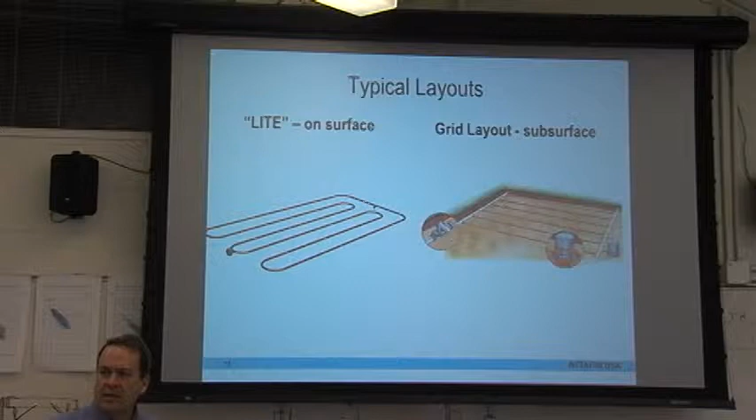Because of the maintenance and labor to install it, people are going more to the inline, and the inline can handle many more different applications within our landscape.

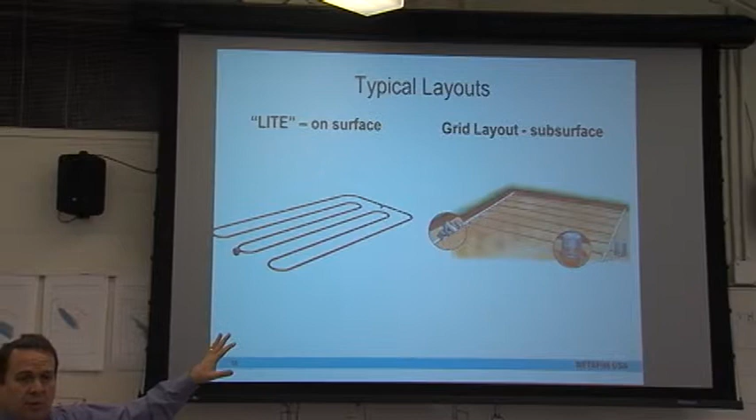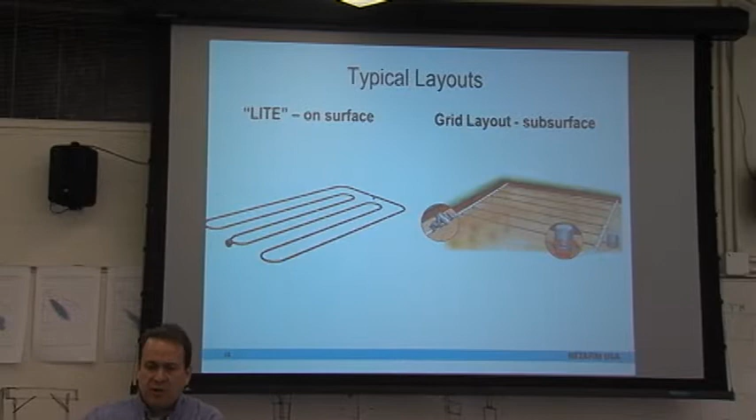So what we have is two layouts. When you're designing a system, you're going to be thinking about two different layouts. One is what we call a LITE system, where we're going to have a valve, filter, and a pressure regulator up front connected to the main line. Then we're going to connect the Netafim tubing, or inline tubing, and snake it out through the shrub bed, then bring it back in on itself. Very quick and easy install.

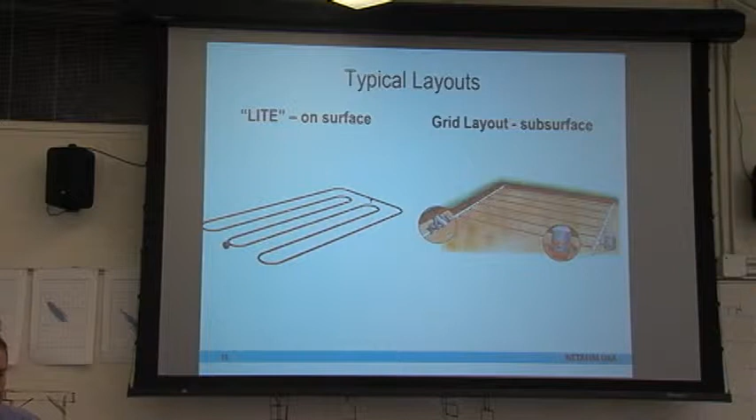These tend to be used in residential applications, smaller shrub bed applications, and flower beds. We'll go through the parts and pieces later of how they get connected and what we're doing.

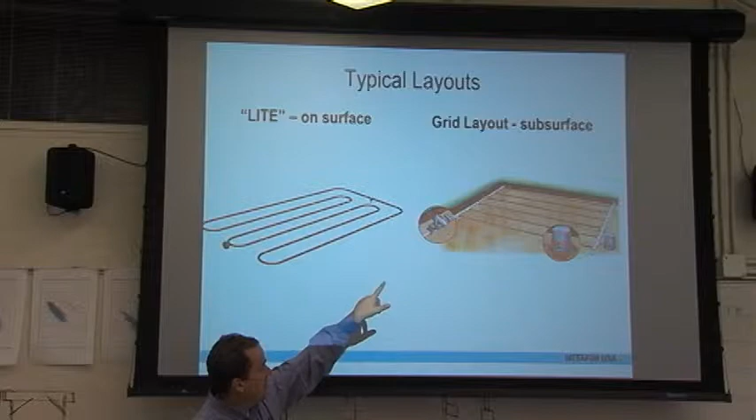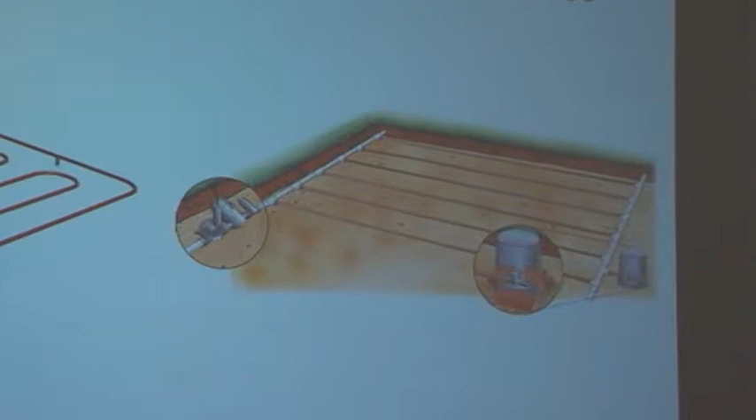The grid system, which is this one over here, will have a valve, filter, and pressure regulator. And then we have what we call a supply header, and that supply header is that piece of PVC going out there. Then we connect into that supply header with our tubing, and the tubing goes down through the shrub bed, and then we have what we call an exhaust header, which is this piece right here. Then on that we put a flush valve on this side. This header here is not connected to this header by any other means other than the inline tubing.

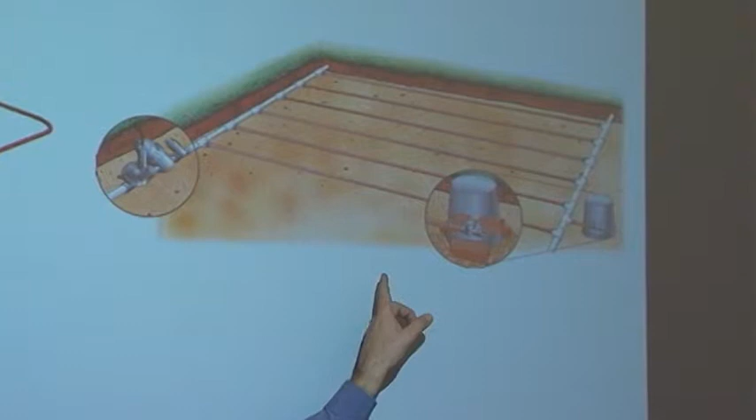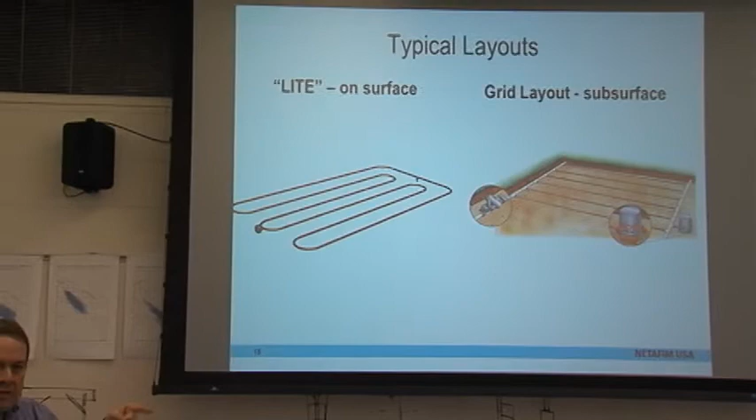So what happens is the valve turns on, the water flows through that header, flows down through the inline tubing, and the whole system's charged. The water's actually moving in a couple of different directions within the tubing, and then the emitters are irrigating and applying the water, and going from there.

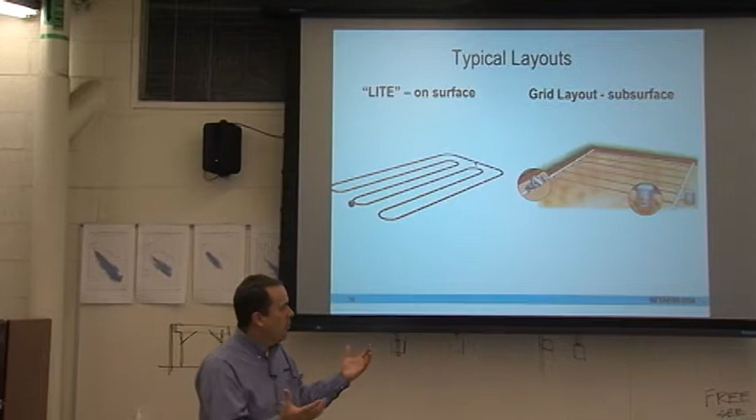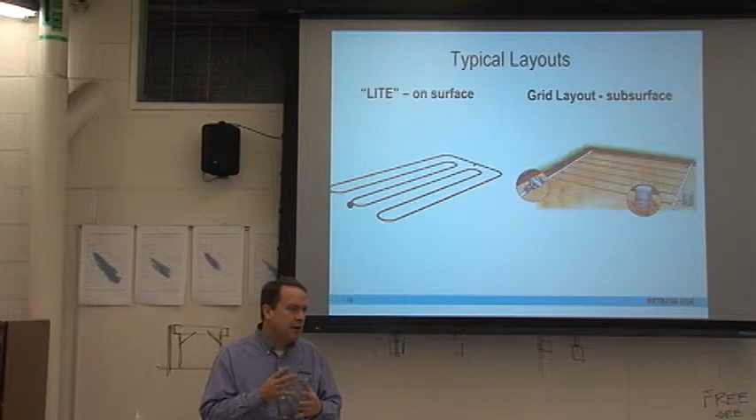This valve down here is mainly a manual ball valve, and what it does is allow us to open up the system and drain it in the fall for winterization, or it allows us to flush any dirt and debris that may have gotten into the system from someone cutting the tubing or a repair. They'll open that ball valve up while the system's running and flush the dirt and debris out of the system.

So the trick here is, first of all, am I going to be designing a LITE system, or am I going to be designing a grid system? That's the first thing as a designer that you're going to be thinking about.

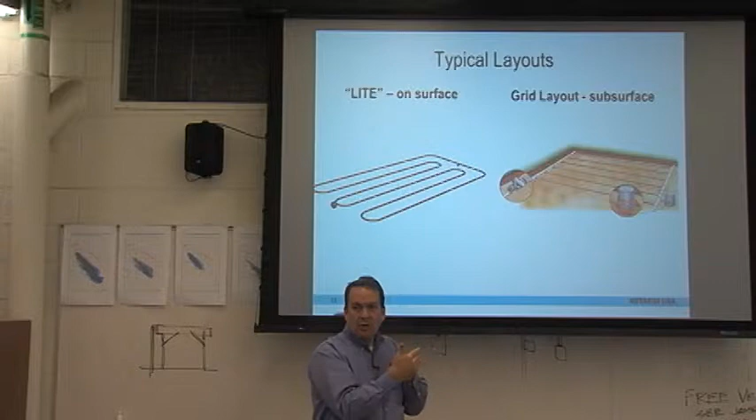After that, you need to determine what emitter flow rate I'm going to be using: is it the 0.26 gallon per hour, or the 0.9, or the 0.6, or the 0.4? And then what emitter spacing, and how far apart am I going to put my tubing? When you're designing that drip, that's primarily what you're looking at. We'll go through that here in a second.

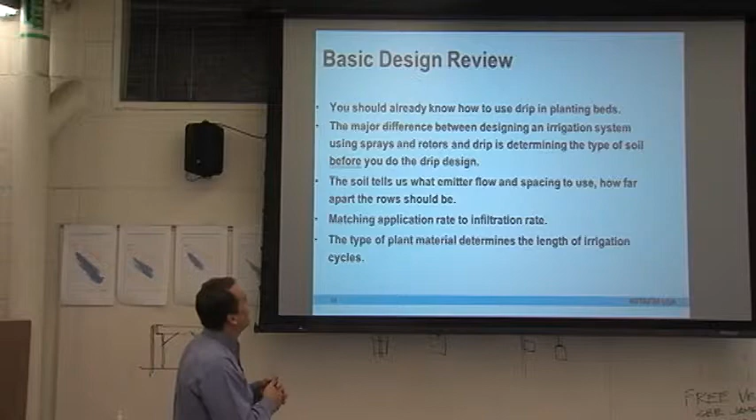This is a slide that I use for my contractors, so I say you should already know how to use drip in a planting bed. That might not necessarily be the case in this application.

The major difference between drip irrigation and overhead irrigation is we're not so concerned about what we're irrigating, whether it's turf or flowers or those kinds of things. We're more concerned about the soil in which we're applying the water to. With a higher clay soil, we know we have to apply the water slower, or else it starts to run off. So we're much more concerned about our soil types than the type of plant material we put in our designs. That's going to dictate how long and how much water we're going to apply on a daily or weekly basis. It's the soil that the water is moving through that we're trying to keep the roots alive for the plant material. That's one of our biggest concerns.

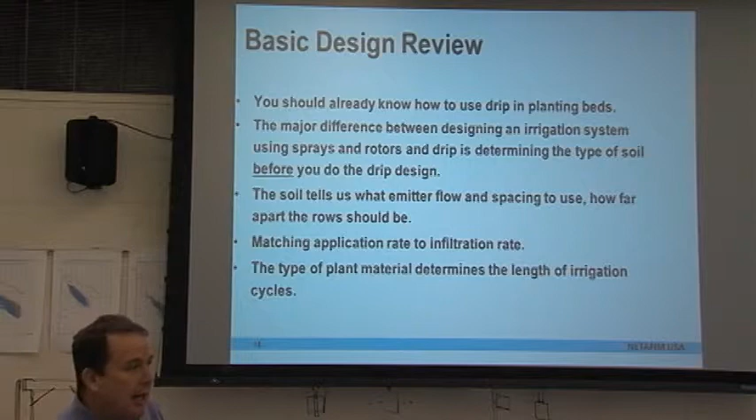Okay, so here comes our soils class, and I apologize for doing this - the first class of the morning, the week after a 3-day weekend. I apologize, it's not fair, I know.

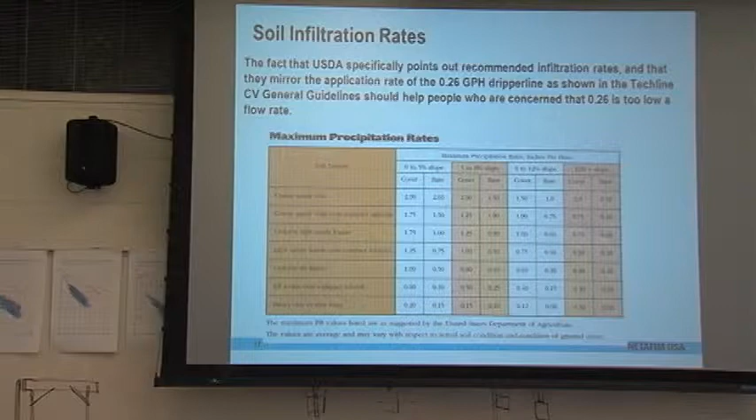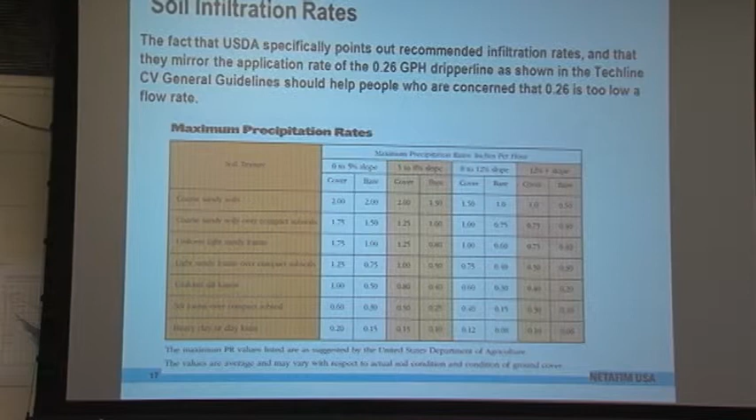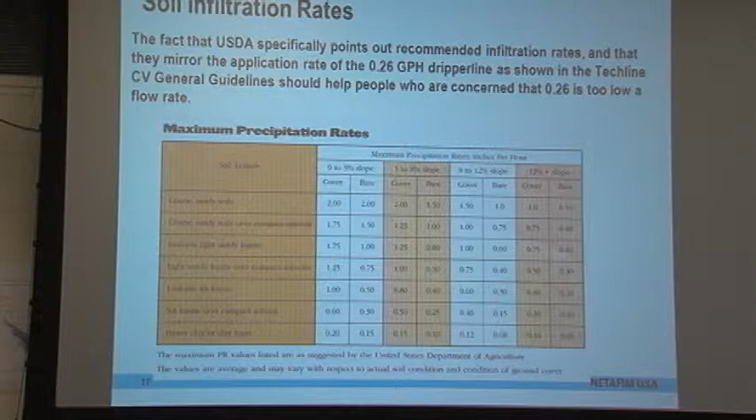Basically, what this is showing is the USDA took a look at the different soil types we have, and looked at the rate at which water moves through those different soil types. When we look at a clay soil, the water moves very slowly through there. When we have a sandy soil, the water moves through that sand very fast and tends to be more vertical, where the clay tends to have the water move more horizontally in the soil profile.

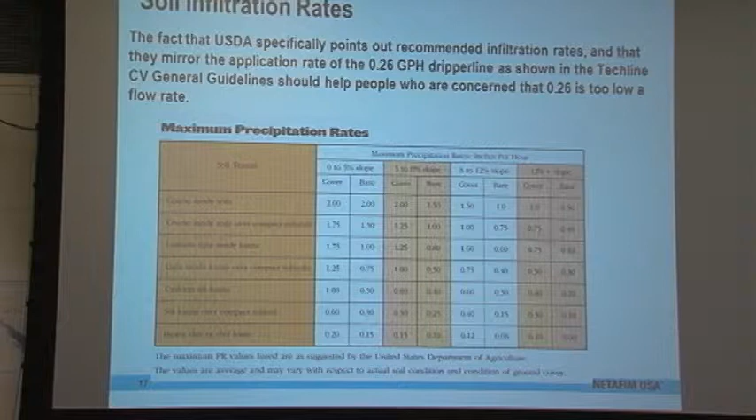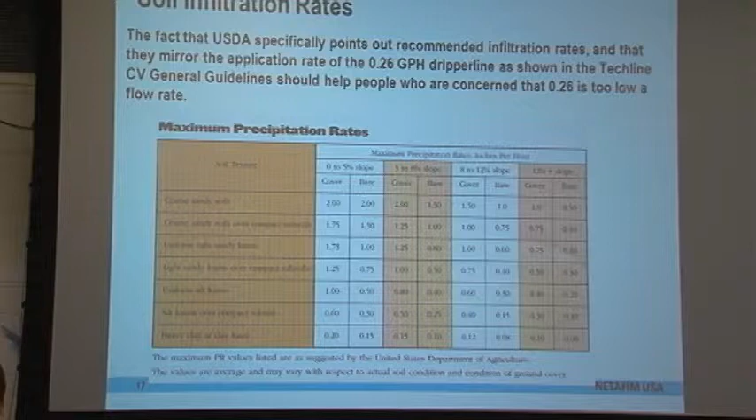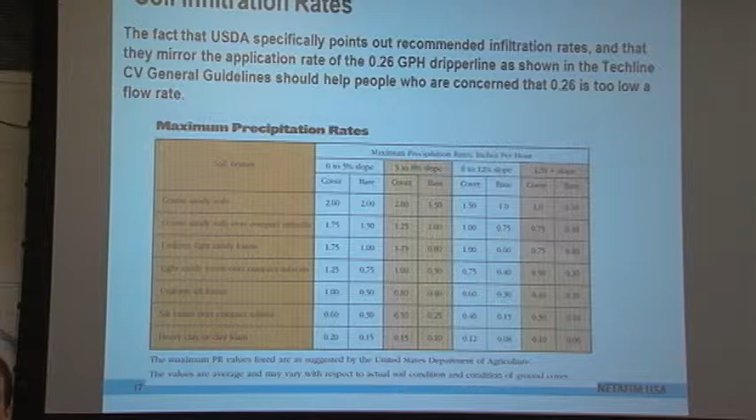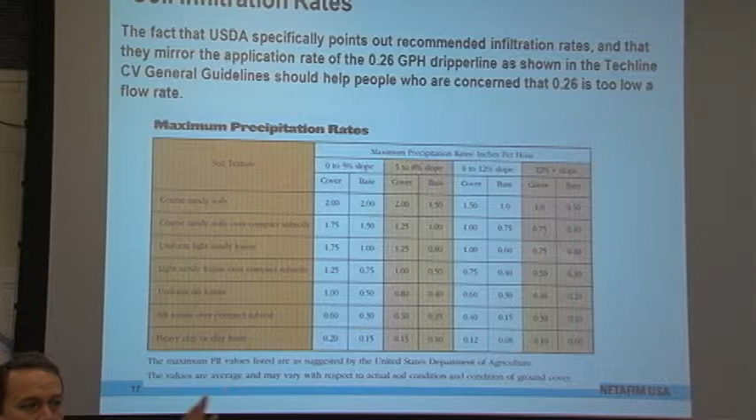So what they did is they looked at this United States Department of Agriculture chart, and basically they took the rate at which water moves through the soil and converted it to an emitter flow rate. So when you choose, remember I showed you 0.26, 0.4, 0.6, 0.9 - basically if I have a clay soil, I'm going to use a certain emitter flow rate, and if I have a sandy soil, I'm going to use a different emitter flow rate.

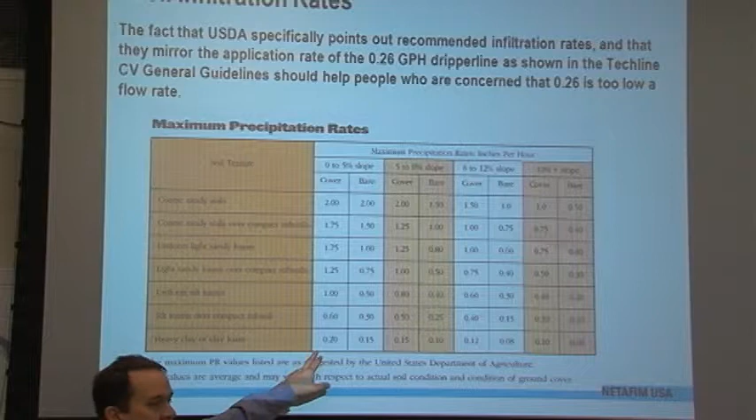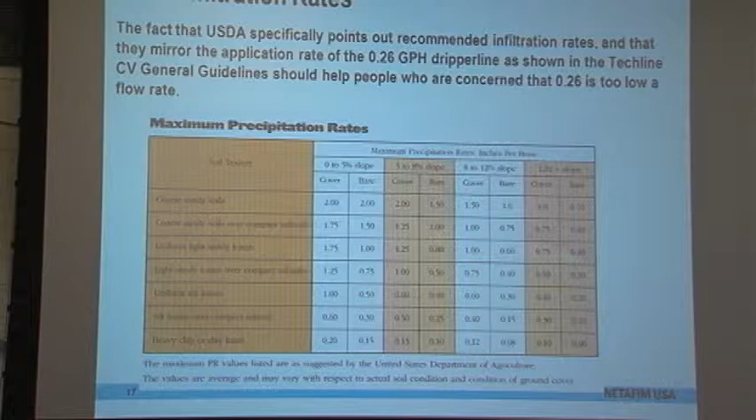Those emitter flow rates match up exactly with the rate at which water moves through the soil. What they found is that by matching the emitter flow rate with the soil type, they can move the water farther and faster in that soil than applying a higher flow rate emitter that the soil might not be able to handle.

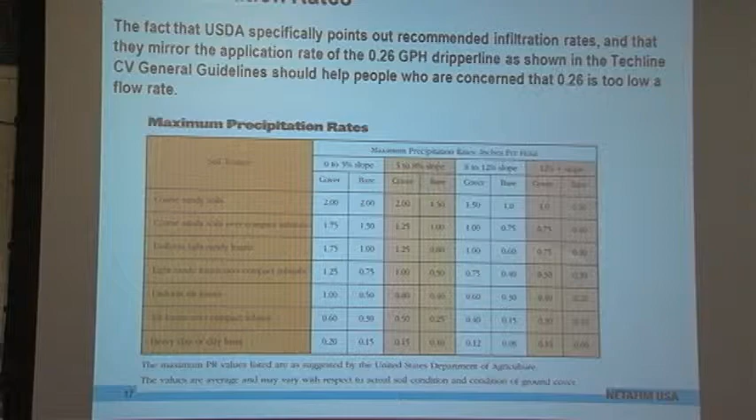A question - I'm assuming the cover and bare soil refers to whether there are plants providing shade. Correct, and primarily because...

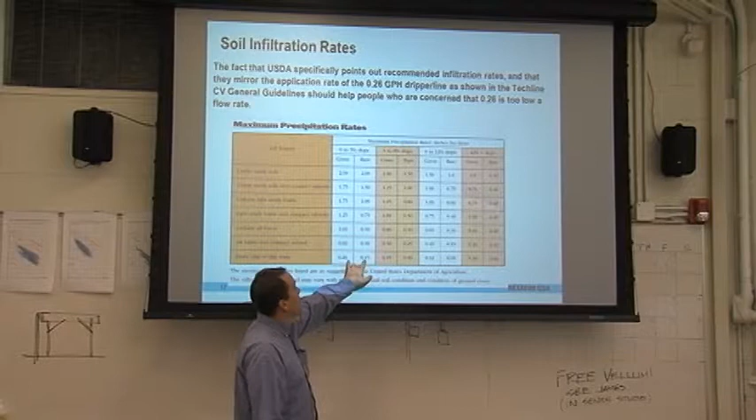The big thing here on bare versus cover is that if we have bare soil with no cover, that soil tends to dry out, and we know it's much harder to move water through dry soil than wet soil. So we have a lower application rate in bare soil because it tends to be drier. Once soil gets moist, typically on the drip side, we want to keep it moist - we don't want to let it dry out, because once it's moist we can move water through the soil profile much easier than once it dries out. It takes a lot more water to do that. So that's one of the tricks.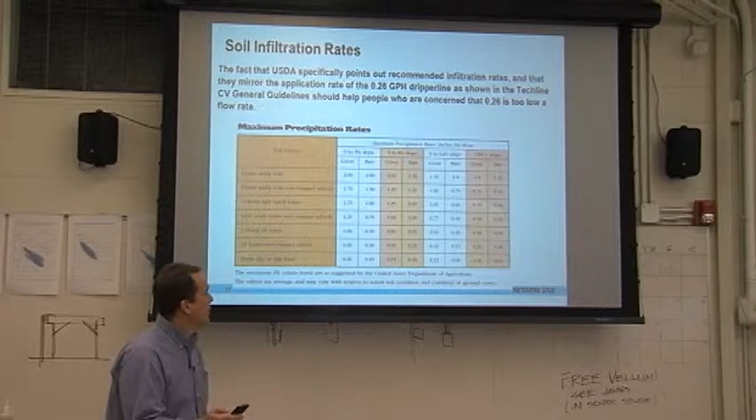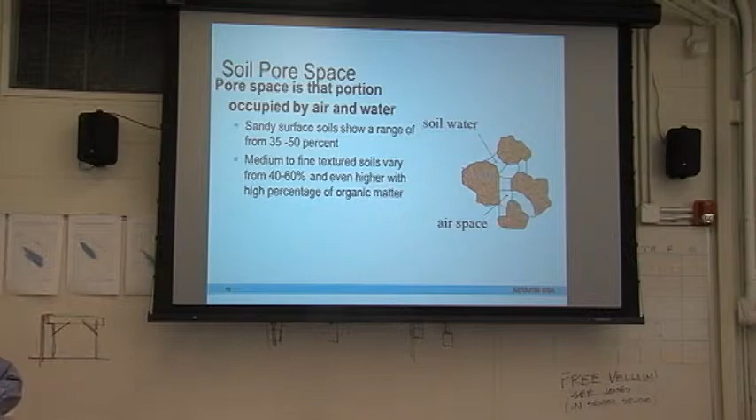Okay, we've all seen the soil triangle, I'm not going to go into that. But soil pore space - the space between the particles - is basically where we have air and water.

When we're looking at a sandy soil, the range of pore space is 35 to 50%. That's how much space there is in sandy soils. When we go to medium, fine textured soils, it's 40 to 60%. And when we get into clay soil, it's somewhere between 55 and 75%. That just means there's more surface area in our clay soils because the particles are a lot smaller.

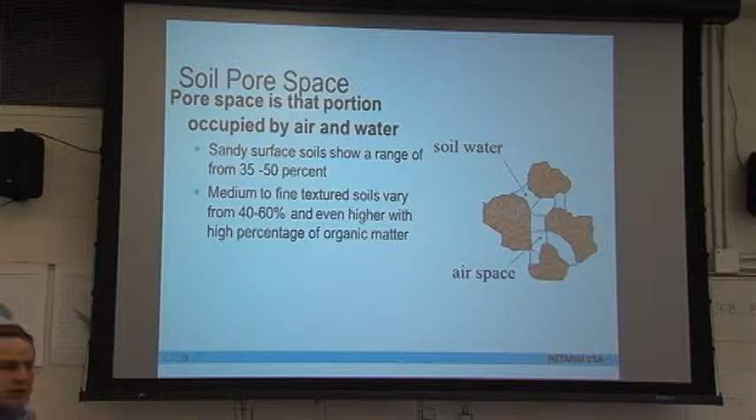The process of the soil-air interface is what we were talking about on that chart - the rate at which water moves through sandy soils. The larger those spaces are, the easier it is for water to move through those soil particles.

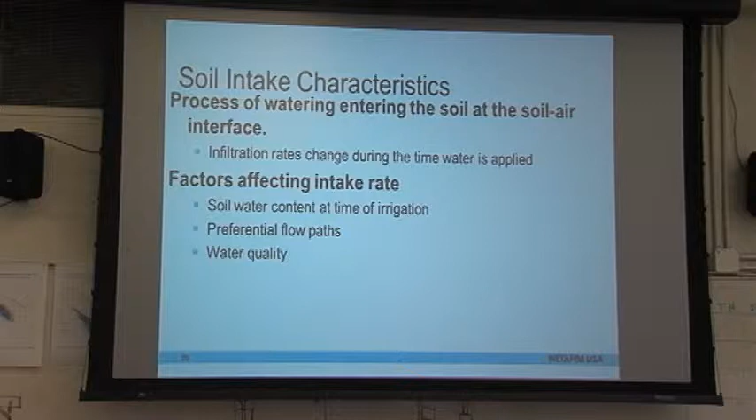The other thing we need to look at is that soil particles are negatively charged and water is positively charged. Once we have that attraction, as the amount of water increases, it reduces - the stronger that bond is, the drier our soils, and the harder it is to move water through the soil. Once we add more water, the greater distance we get, the less tension we have in our soils. I apologize for even going into that, but it is what it is.

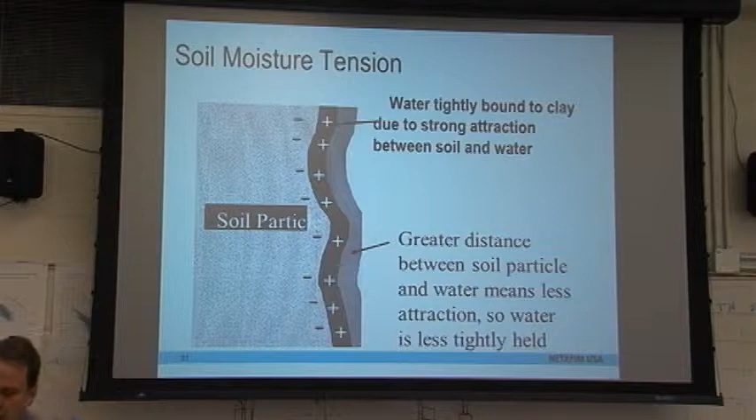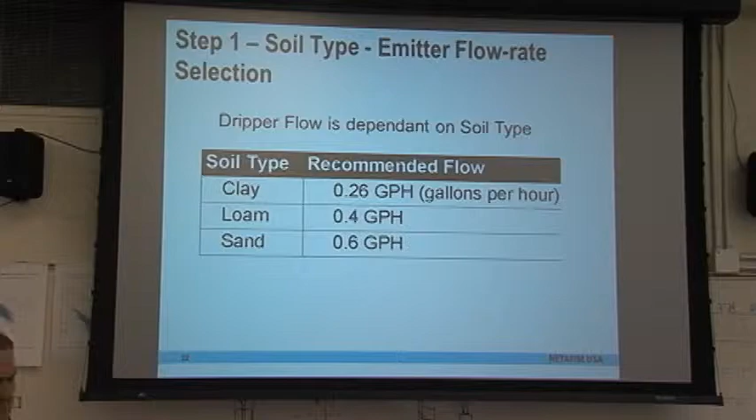I would hate going through that in detail, and that's why I went over it very quickly. So here's our design steps. If you have your catalog, you can follow along, and you can also follow along in that handout on page 8 of the catalog.

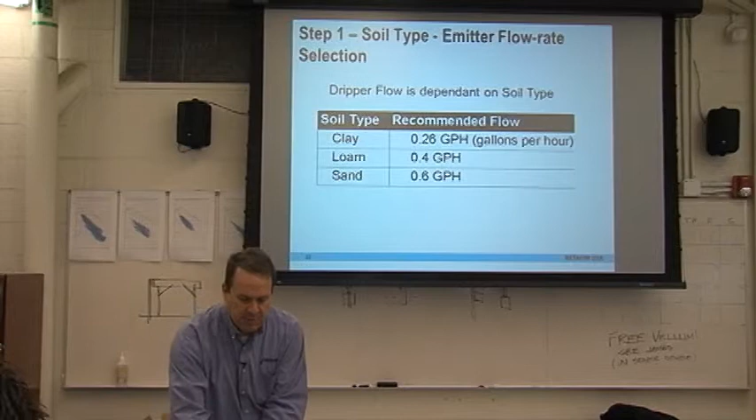This page 8 really is kind of what we're looking at from a design application - these are the steps you're going to go through. So we're going to basically look at the general guidelines chart there. The first question it asks is: are we irrigating turf, or are we irrigating shrubs and ground covers? Can you guys see that?

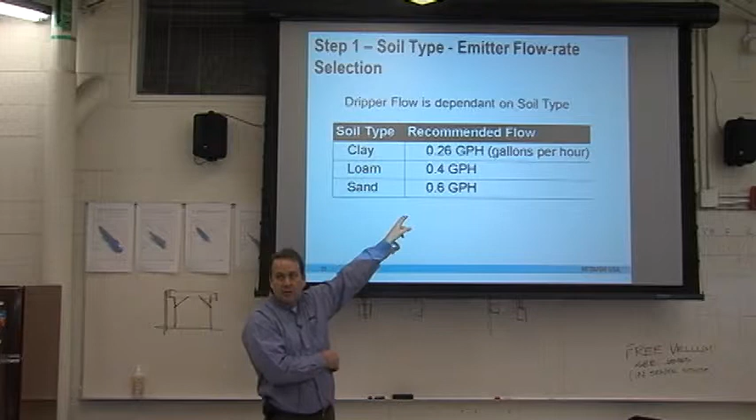Once we answer that question, we look down and say, what's our soil type - do we have clay, loam, or sand? That's basically what this chart is showing. If we have a clay soil, we're going with a 0.26 GPH emitter. If we have a loamy soil, a 0.4, and a sandy soil, a 0.6. This ties back into the soils we just talked about - we're applying water slower to our clay soils so we don't get runoff, and faster in our sandy soils.

I will tell you right now, 85% of the soils we deal with in the United States are clay. Because we're a glaciated continent, we have a lot of silts and clays in our soils, and that's the challenge we have. We do have some sandy areas, but not very many - a few loamy areas, but primarily clay is what we're dealing with.

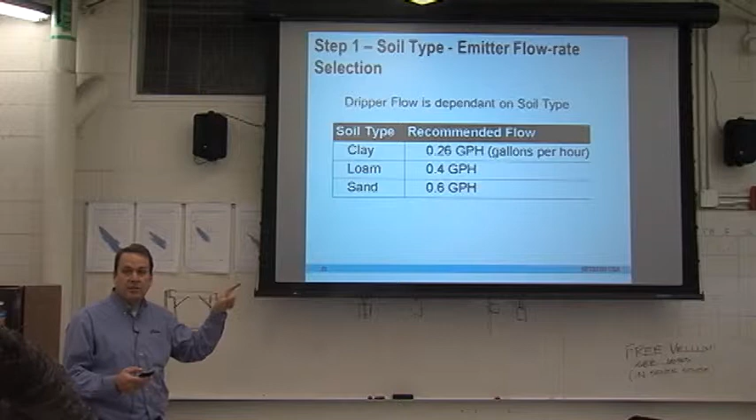So the answer for number one is we're going to go with a 0.26 emitter flow rate in our clay soils, or whatever the appropriate rate is. Now we need to determine how far apart we're going to have emitters in our tubing. There were three choices: a 12-inch spacing, an 18-inch spacing, and a 24-inch spacing.

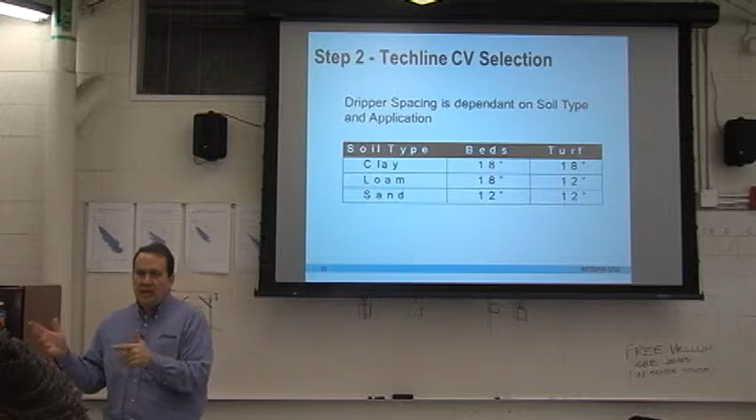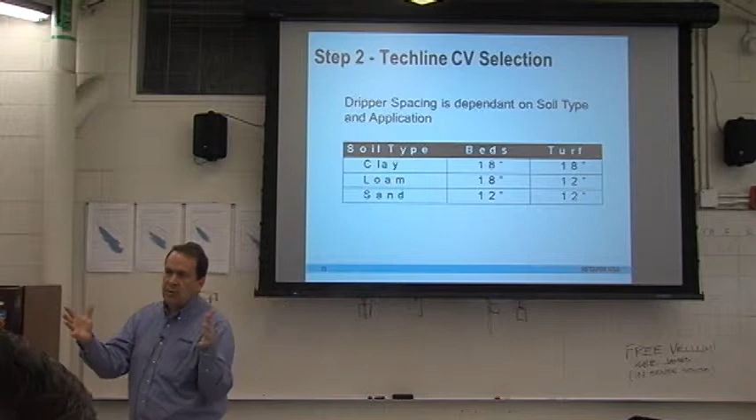So when we have our clay soil and look down at emitter spacing, it shows us what we're looking at - with clay, we're putting our emitters farther apart. In our sandy soils, we're bringing everything closer together.

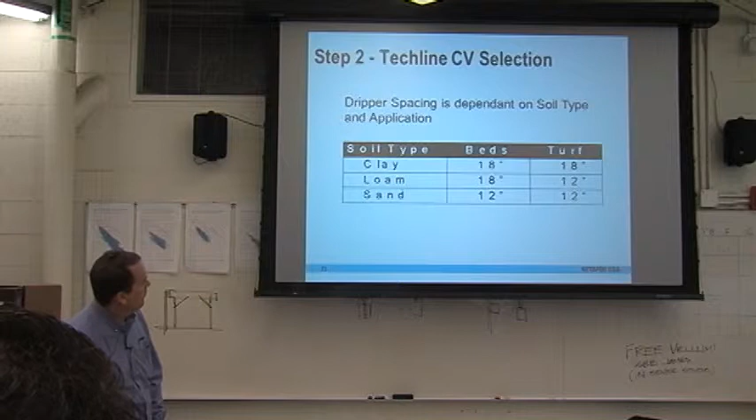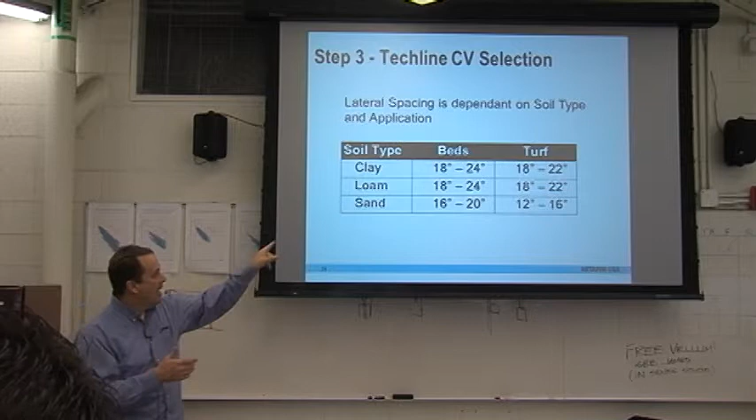Now we need to look at how far apart we're putting our tubing together. Remember that grid layout we looked at earlier, with the exhaust header we were connecting to? We're determining how far apart we're putting that tubing in that connection. In clay soils, everything's 18 inches apart, and in sandy soils, things tend to get closer. It also makes a difference whether we're looking at shrubs or grass.

Okay, a lot of math here. This isn't a math class, so I'm not going to make you calculate all this stuff, because who has smartphones? If you have one, there's an app out there you can buy that will do all the calculations for you. So, hint for your test, if you ever have one, just get the app and you're good.

Do they let you take your phones into tests? No? We could. We didn't have smartphones back then—we had the old HP calculators that we'd program all the calculations into, and then we'd just enter in the numbers. That's how we got around it.

The other thing we need to figure out is how much tubing we'll need, and we'll go through this in a few minutes. There's a calculation on a certain page for how much tubing we use—it's probably in the very back. Page number 63 is where you'll go through all your calculations on your tubing.

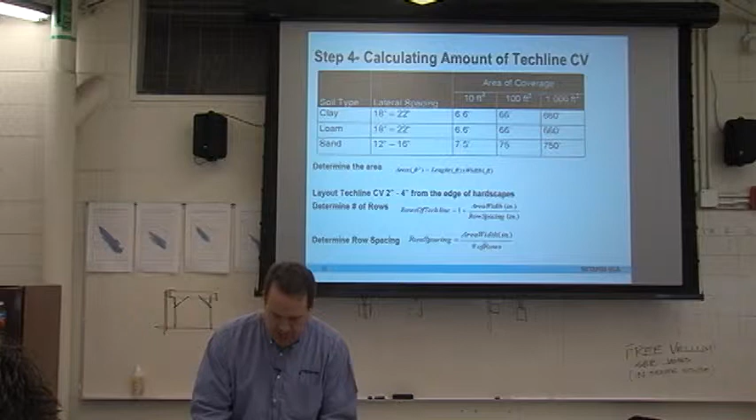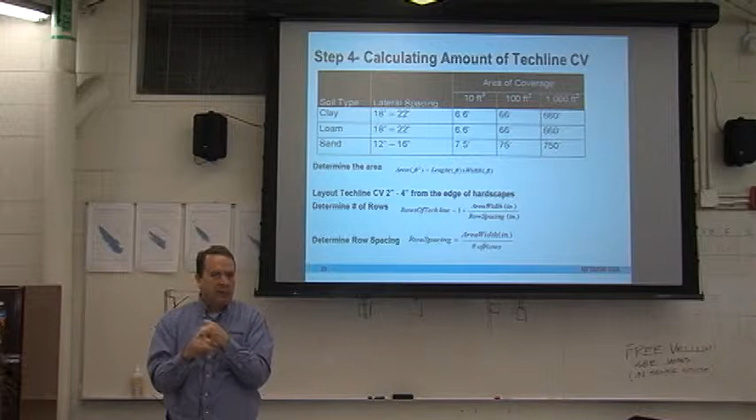We'll come back and do some real life examples. We'll put the board up after this and go through it so you guys can see how this works. Basically, we're trying to figure out how much tubing we're putting in an area, because that tells us how many emitters we'll have and what our flow rate is. We'll figure out our flow rate so we can size our valves and our filters.

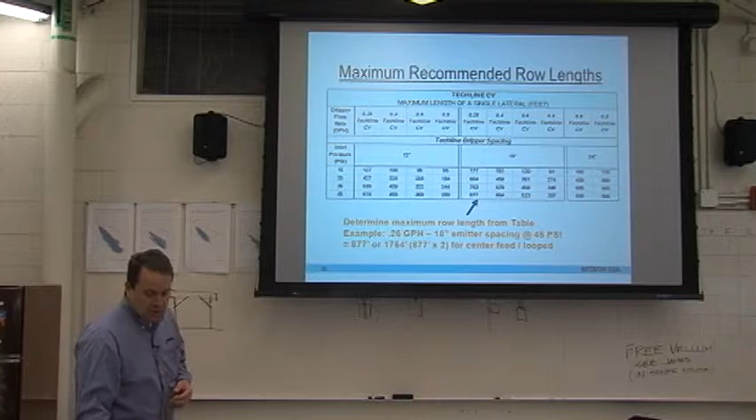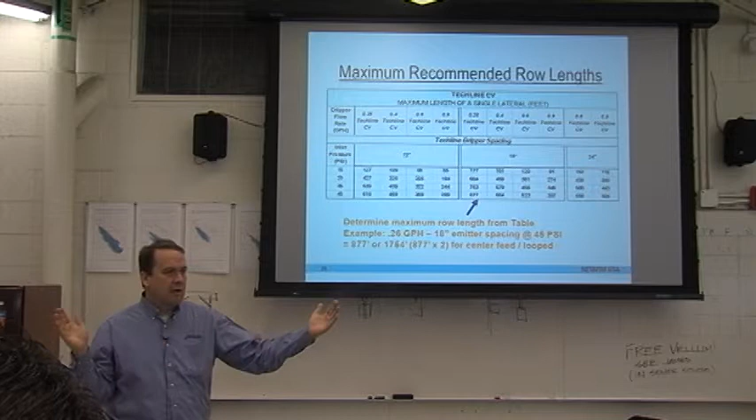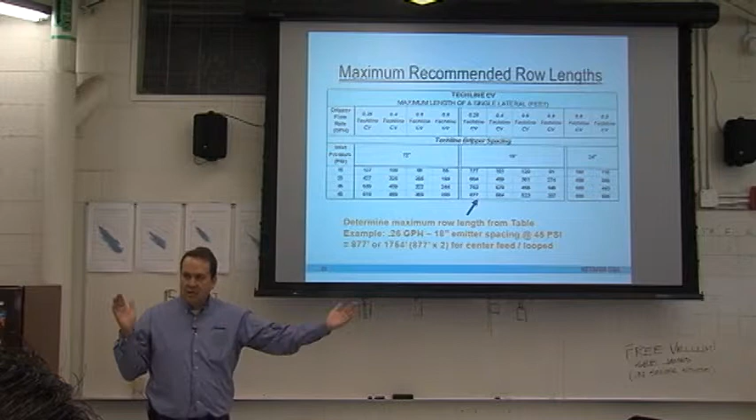So now we have that header—remember the supply header and the exhaust header? One question we need to figure out is how far apart can we do that? If we have a median in a street that's a quarter mile long, 1,320 feet, can we have our headers in one zone? What kind of distance are we looking at?

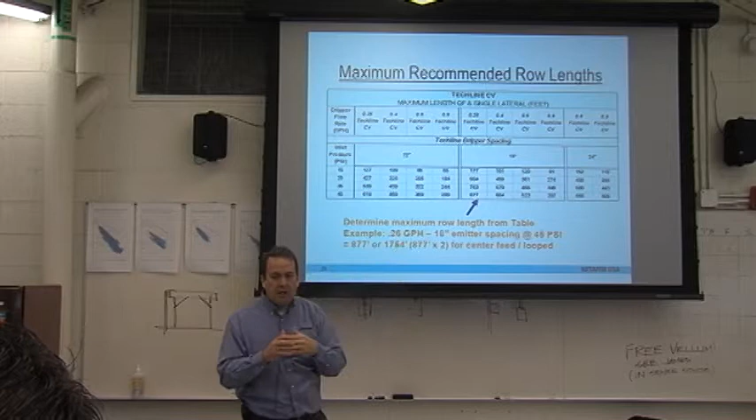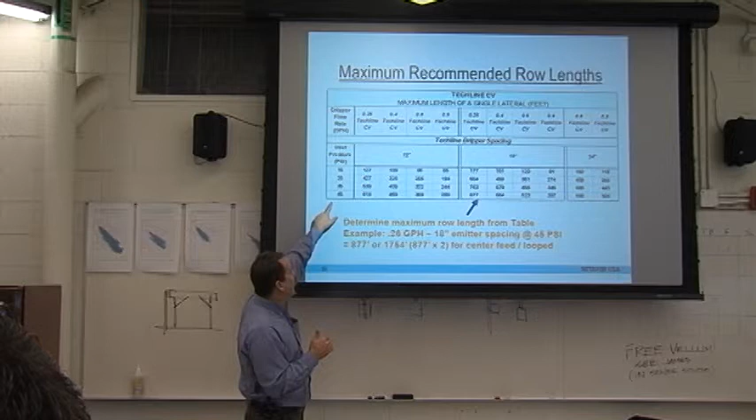Different pressures allow us to go greater distances. So we're going to look at what size of pressure regulators we're going to specify in our design—are we going to go with a 15-pound pressure regulator, a 25, 35, or 45-pound? Typically with inline drip, you always want to go with the higher flow or higher PSI pressure regulators, because it allows us to go a greater distance.

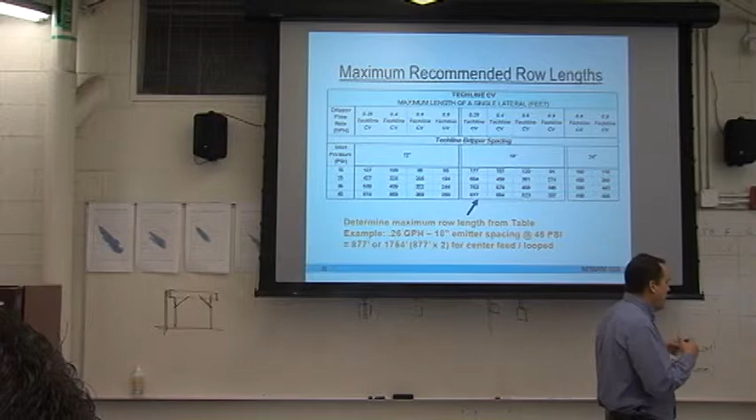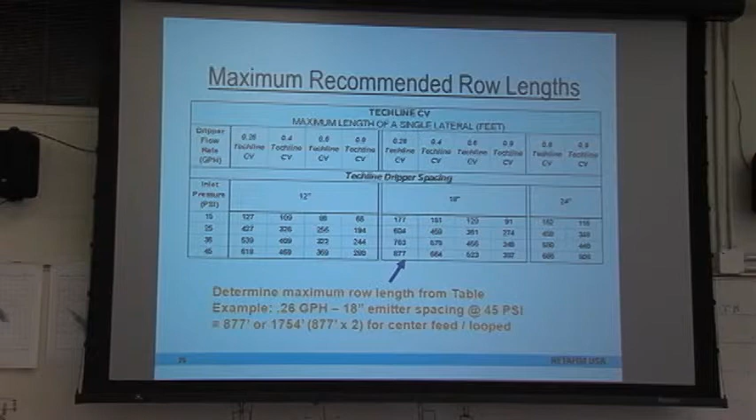That's shown right here: if we're using a .26 with a 45-pound pressure regulator, we can go 877 feet between our headers. If we specify a 25-pound pressure regulator, we can only go 604 feet. So those are some of the things you're going to look at when designing this.

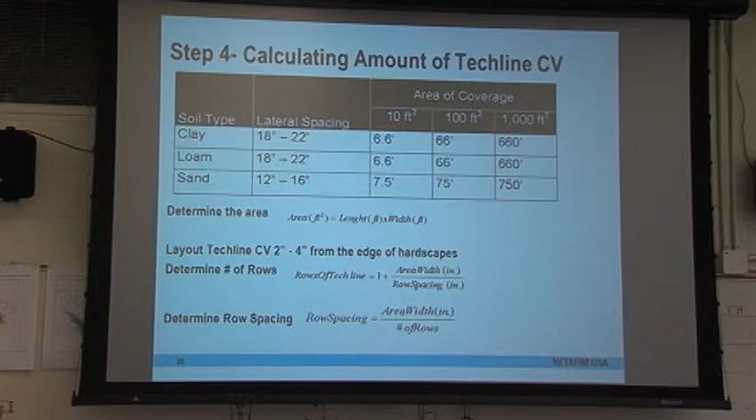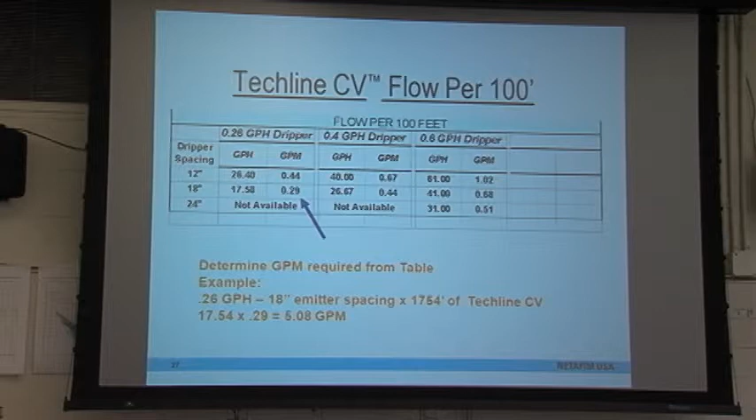That's a question or answer we need to have on there, and we'll look at that. Then the next thing we need to figure out is how much water we're putting in with our tubing. On this chart, the flow per 100 feet, you can look at your emitter flow rate and the spacing, and it will tell you that for every 100 feet of tubing your flow rate is 0.67 gallons per minute. If you have 1,000 feet of tubing, you can quickly calculate the flow rate for that area.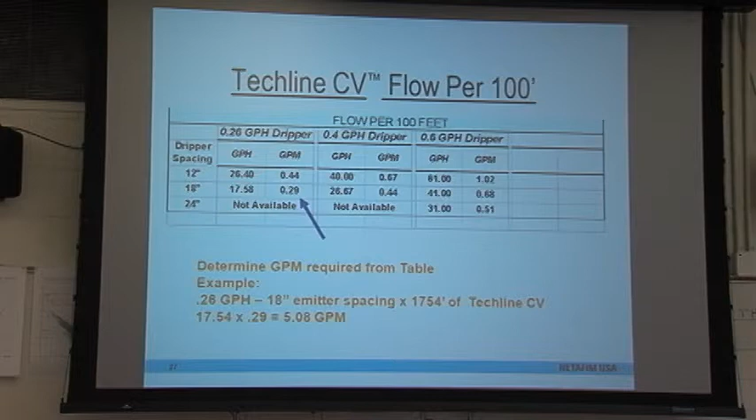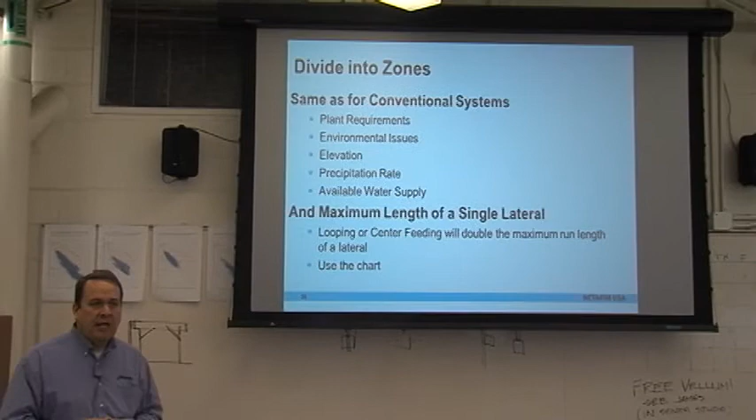We'll come back and make this real world after this—I just want to show you what the parts and pieces are here really quick. So one of the challenges we have with drip irrigation is that we can cover such a large area with a small amount of water.